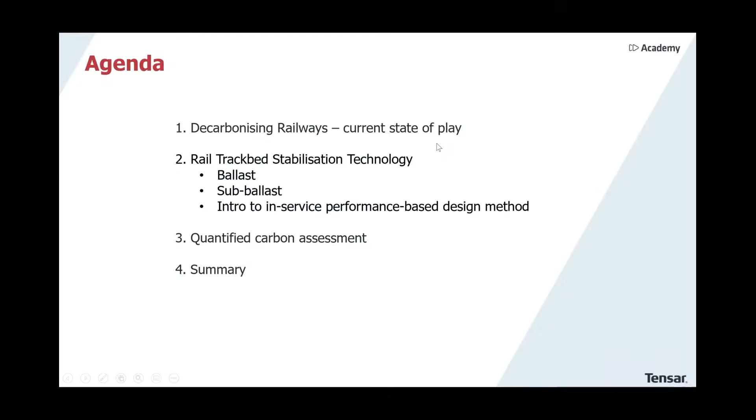The agenda for today will start with a general overview of the current state of play relating to decarbonising railways, referring to the latest industry publications, and tying that in with the latter part of the presentation, where we'll apply the understanding of Tensar's rail bed trackbed stabilisation technology in terms of a quantified carbon assessment, showing what the reduction in CO2 equivalent would be for adopting geogrid product systems within the trackbed in certain cases and scenarios.

The summary will give a quick recap of what we've covered, and then we'll open the floor to a Q&A session. I want this to be as interactive as possible, so if you've got any thoughts or queries, we can talk that through.

An important one to start with: the Network Rail environmental sustainability strategy, with 4 key points identified. The first is the strive towards a low emission railway, as we talk about electrification, battery powered trains, and so on.

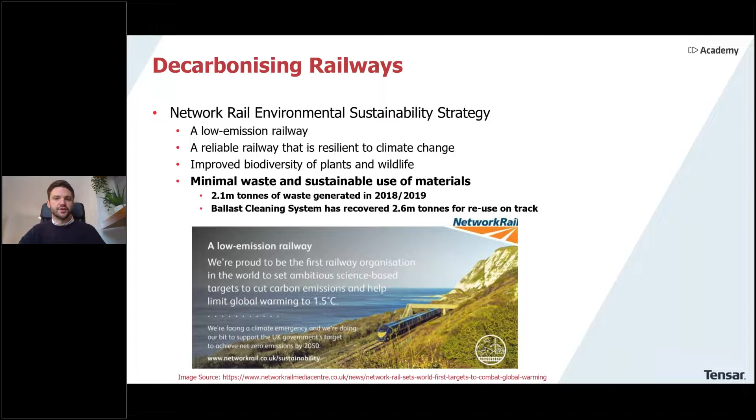Linking this to the earthworks technical strategy, this takes on from the sustainability strategy about the impacts of climate change. We're all aware of the change in weather patterns and the intensity of that over more recent years. How can we make that more resilient? This is the critical infrastructure which we need to maintain.

Prolonged wet weather, increasing pore water pressures for instance in clay slopes, washout in granular slopes, the seasonal shrink and swell - a lot of these key parts which we can start to tackle with different types of trackbed or embankment stabilisation technology.

An interesting one as well, when we start to potentially talk about modal shifts - taking lorry loads off the roads and putting them onto train tracks. Are we likely to see increased embankment traffic loading and tonnage growth as we see the need to add to what we've got with passenger trains? If we're going to have increased freight, then we need to make sure we're designing for that accordingly and can make that resilient.

So we will touch on that again later in terms of how Tensar have developed our design method to take into account these variables.

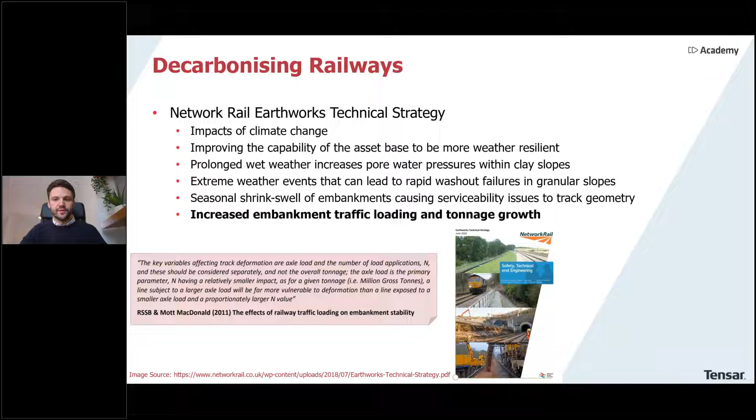The PAS 2080, carbon management in infrastructure, is a critical publication in my eyes. The world's first specification for managing whole life carbon in infrastructure. It's certainly been discussed within the advisory committee I'm on, which Joe mentioned during the intro session. Some very important information and guidance on there about having meaningful reduction targets, baselines, quantification, so we can have some tangible goals to work towards.

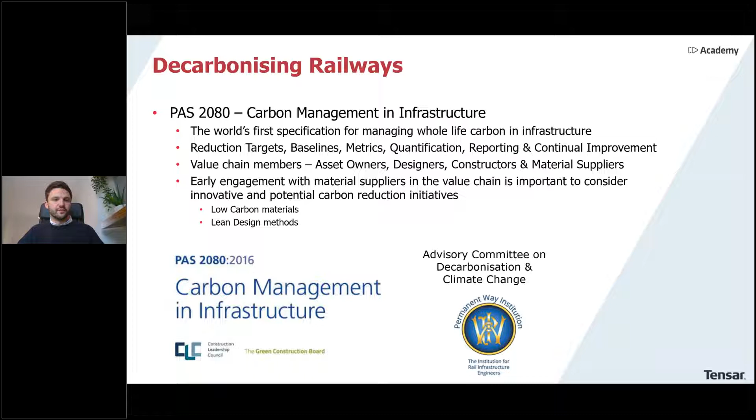An important feature of it is having collaboration through the value chain members, not just through the asset owners such as the likes of Network Rail. How can we engage from the designers down to the contractors, the people actually installing the systems, the material suppliers? How are we embracing innovation and adopting the improvements made in technologies? This can look to source low carbon materials from the onset, or essentially look to make benefits of leaner, evolved design methods.

The RSSB rail carbon tool - there's a variety now of different carbon tools available for general infrastructure projects, but the RSSB one is specific to rail. You can see now, as part of the Network Rail environmental and social minimum requirements, that it's a necessary undertaking for a carbon assessment on a project with a net spend of over £1 million on civils, track or OLE. The projects must demonstrate that the results have subsequently been assessed and influenced the design and construction, reducing embodied carbon and saving, leading towards economical benefits as well.

A standard input source of information for these would be the environmental product declaration sheets, which we'll touch on briefly in terms of the data Tensar have available for input to these types of carbon tools. There's a lot of general information that can be put in, but in terms of product specific data, this is the general requirement which we can share as a material supplier.

Setting the scene, we'll now delve into rail trackbed stabilisation technology to put into context where Tensar can come in and start to create benefits in terms of the trackbed construction.

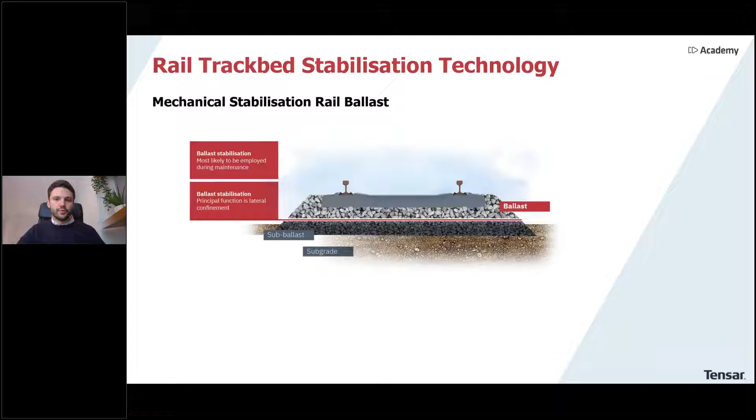In these conditions, we were using a typical 300mm ballast with and without geogrid, and we looked to see how that build-up would react to cyclic loading, simulating rail traffic movements.

This was done over soft and firm subgrades, and the general benefit shown was a magnitude of around 4 in terms of the extended service life period before reaching its critical sleeper settlement limit. So we could see there was a concept there which could be taken forward onto larger scale testing to validate the performance of this type of technology.

This was ramped up with British Rail in 1994, where a 40-ton rolling rig load was tracked along, simulating up to 2 million equivalent gross tons, again with various build-ups with and without a ballast stabilisation geogrid utilised.

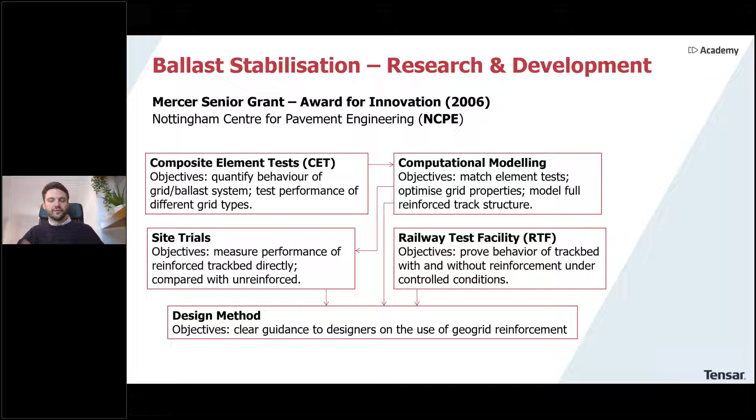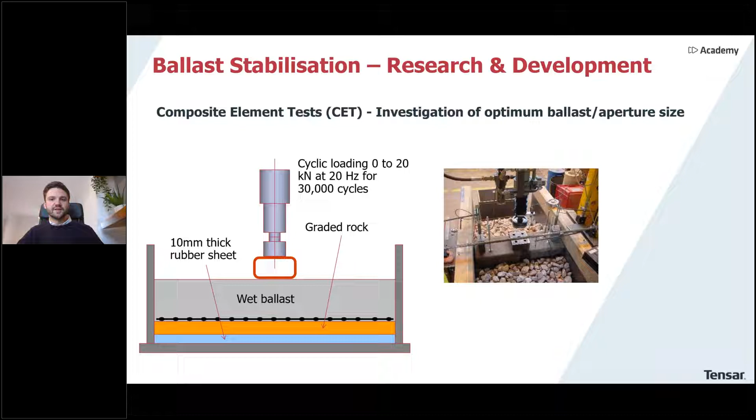If we look at the typical grading of a ballast aggregate, what we were able to do then is look at different aperture sizes of the geogrid to see, under small scale cyclic load tests, how these geogrids fared and what the optimum material properties were.

What we found from the aggregate gradings was that the optimum aperture size correlated to around the sieve size where 50% of the grading was passing, multiplied by 1.4.

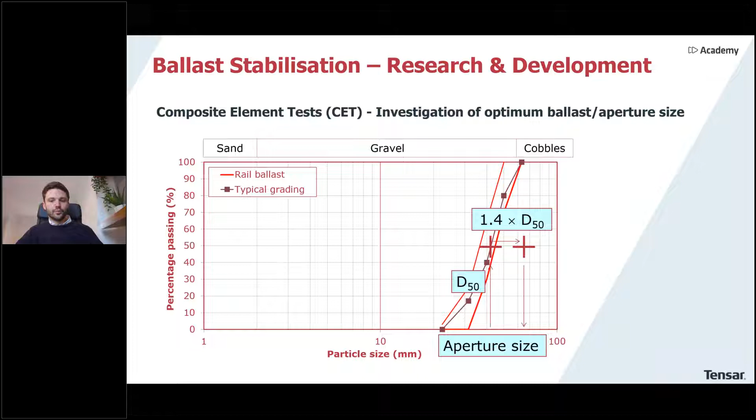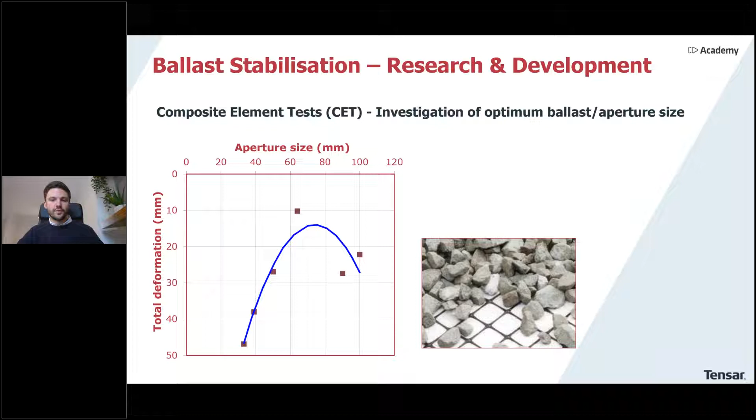As we can see by this neat curve, geogrids with apertures that were too small didn't allow effective interlock, whereas where the apertures got too large to effectively provide that interlocking confinement, the performance dropped off again. So we found this optimum aperture size, which is where the large aperture originates from for use in ballast stabilisation.

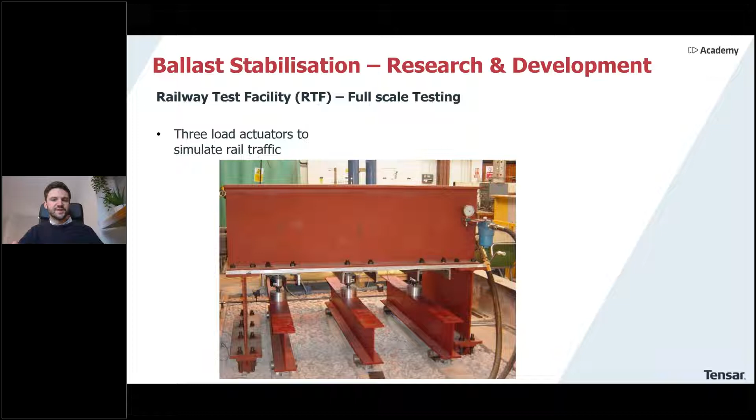Once we had this, we were then able to take a single geogrid through to larger scale testing. The railway test facility had a setup of 3 sleepers with 3 load actuators to simulate rail traffic to a significant number of loadings, up to 1 million cycles.

Again, from our very early laboratory tests back in Canada, to the work we did with British Rail, and now onto this larger scale testing, we can see similar types of benefits. The service period using the geogrid was extended by around 2.5 times before reaching the critical settlement limit for the sleeper, which I believe was around 6 millimetres.

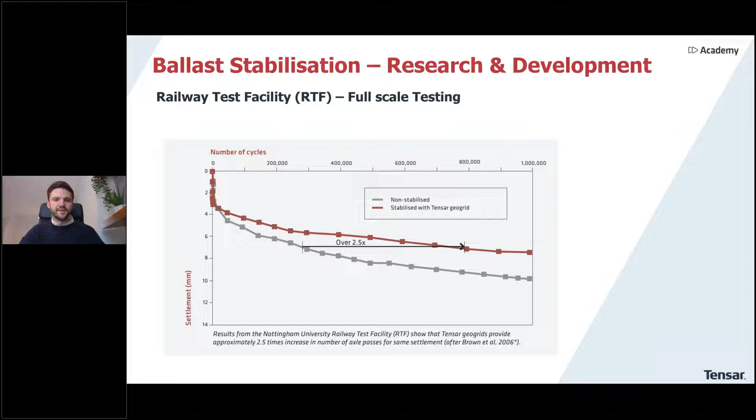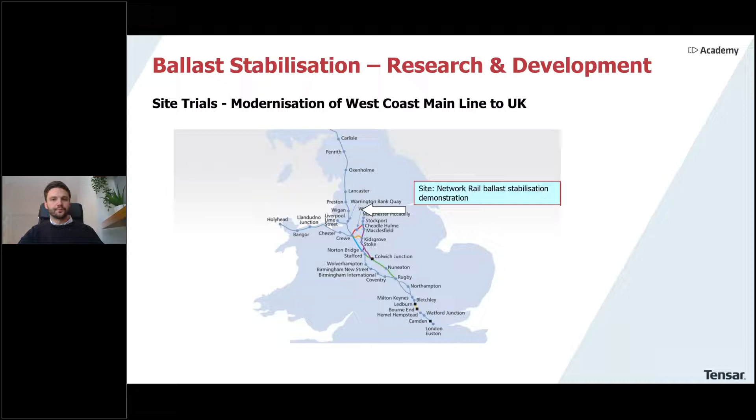Once we'd proven the benefit of the geogrid within that increased testing, we identified together with Network Rail a suitable section on the West Coast Main Line where we could apply it at a larger level with control sections which could be monitored along with the stabilised sections. So this was up in the northwest around the Wigan area.

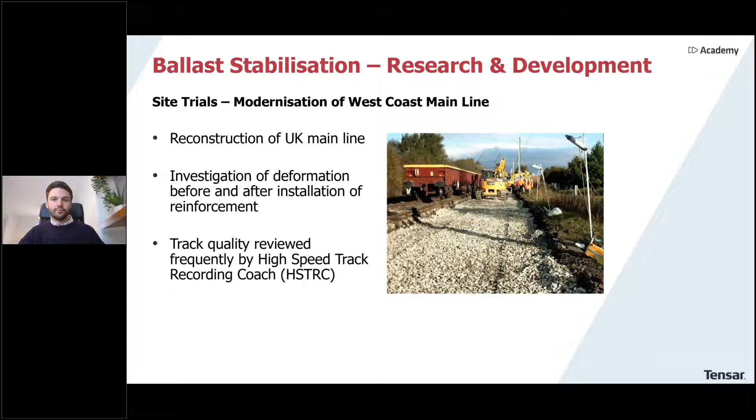If anyone's familiar with Coppull Moor, there had been issues with this particular section, and it was getting towards a point where the frequency of maintenance was leading to a requirement for full reconstruction of the main line. They had the ability to use the high-speed track recording coach, so again we could have significant data fed back over regular periods, so we could really build up a good level of data on how the products were performing in service.

You can see the section of line there, where we were looking at maintenance schedule being applied a couple of times a year in certain phases. Once the installation of the geogrid had occurred, we got beyond 3-4 years before it was reaching anywhere near the need for it to be maintained and have any work done to it.

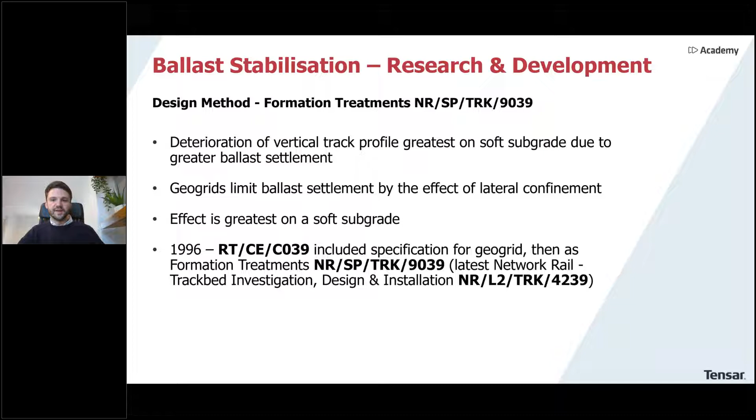And we were able to take this forward into a formalised design method, which is still active today, from the design curves you can see from the 4239 standard. We can see how this was incorporated here, taking those principles of a geogrid over a softer subgrade, providing a similar level of performance to that over a stronger subgrade.

You can see from the 4239 standard here, for existing lines between 50 and 125 miles an hour, you've got the option with and without a geogrid reinforcement. So we're allowing for a lower sleeper support stiffness, which correlates with a lower formation stiffness, but as we've shown through the past research and development, we will provide a similar level of performance.

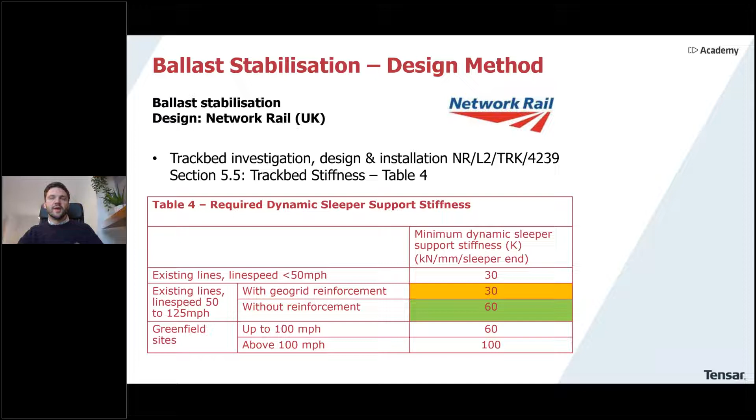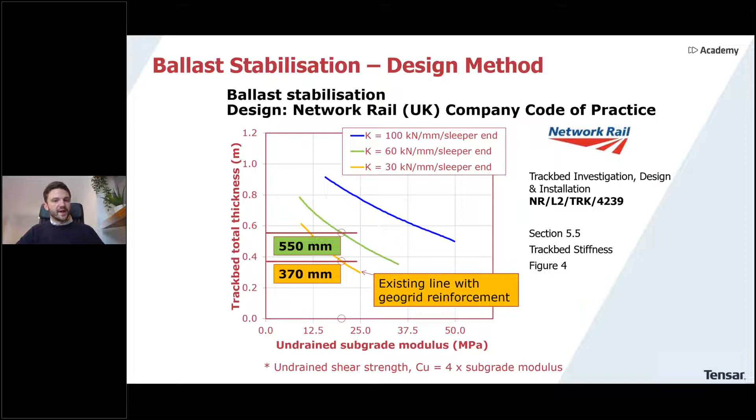If we read off the curves there to give an understanding of the impact, we can see if we're designing it for that 60 kilonewton sleeper end stiffness, we've got a build up of around 550 mil for the case shown there, with a 20 MPa subgrade modulus, compared to 370 mil for the same with the geogrid build up. So we're saving in the region of around 180 mil of thickness there of the sub-ballast.

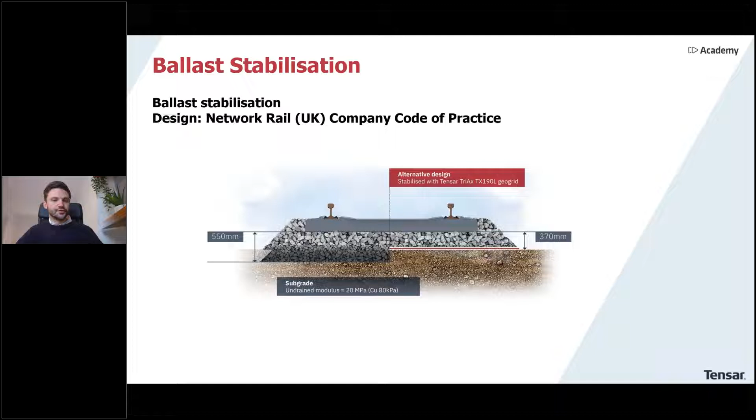So that's limiting potentially the import of the capping sub-base material, as well as potentially limiting the need for disposal of unsuitable subsoils during the excavation.

Back to the timeline. So taking that forward from 2007, where the invention of the Tensar triaxial technology came in, we further developed this technology using a different geometry of geogrid to provide enhanced interlock confinement and a stabilising effect. Work was done to quantify this improvement with the Czech Technical University, where we've got a number of past research works which again demonstrated a betterment over our historic biaxial geogrid technology.

More recent work with Penn State University in America is looking at smart rock technology - 3D printed ballast particles with accelerometers in, so we can actually monitor how this stabilisation effect of the geogrid can limit the rotational movement of the ballast and the subsequent breakdown degradation of the ballast itself.

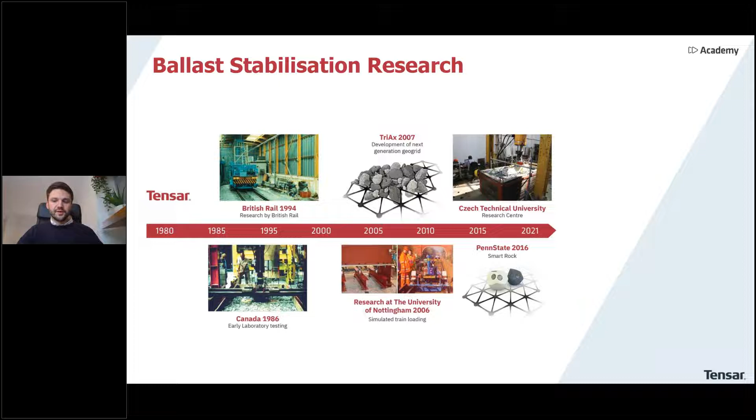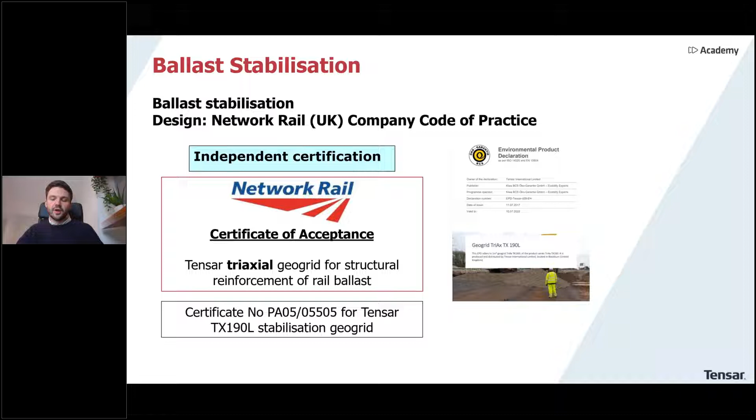For the ballast stabilisation product, we've got the Network Rail approval for the Tensar Triax TX190L product, and importantly, relating to this presentation subject, we've got the environmental product declaration, which can be fed directly into the carbon calculator tools. This is an independent product declaration sheet which covers the embodied carbon of the product itself. It's obviously a manufactured plastic product which has a quantified carbon impact, but it's the associated benefit of that, and in the longer term, which will show the benefits.

On to sub-ballast stabilisation now, moving down through the trackbed layers. As I mentioned previously, our general approach for this is to design the sub-ballast to achieve a target at the formation, so the base of the ballast layer. Typically that would be the dynamic modulus or the EV2 static modulus, and we've got experience of that not just within rail, but within other general applications.

That's one approach. Or again, if we're aware of the high axle loads of the train vehicles, then we can start to model that potentially through finite element analysis to see what the loading deformations may be. We have the mechanically stabilized aggregate layer with increased strength support, which can provide a benefit there.

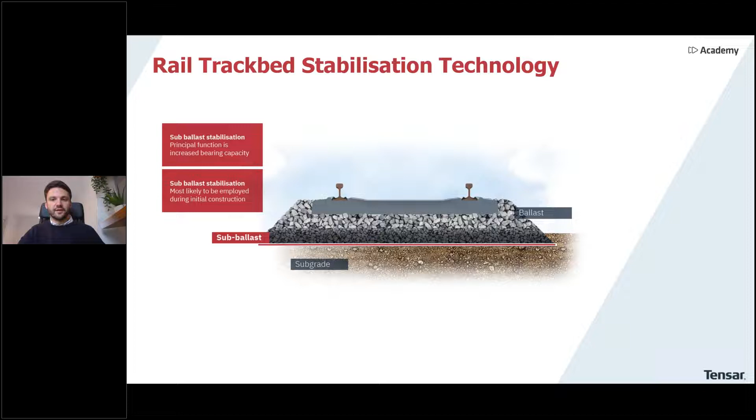It's an established design approach which we've got, but there are a number of variables there. The achieved target level of support stiffness can vary depending on the quality of that granular fill, the weather, and the compaction regime. So there are a number of variables we need to be careful to cover with any sort of guidance we provide.

A lot of this work was initially done across Europe, where this EV2 stiffness modulus has found its way across onto the network rail design standards. We've got significant experience of providing these type of solutions across Europe through our global design offices.

With the advent of triax, we work not just at using geogrids within the ballast, we introduced that within the sub-ballast layers as well, trying specifically for new construction. If we can keep the grid as low down as possible, then we can limit any conflict with future maintenance, tamping, etc.

We also did work with Heriot Watt University looking at high-speed rail ballasted track, not related to HS2, but general high-speed rail projects, which again showed benefits of having this stabilised aggregate in terms of the high cyclic loads from the speeds of the train.

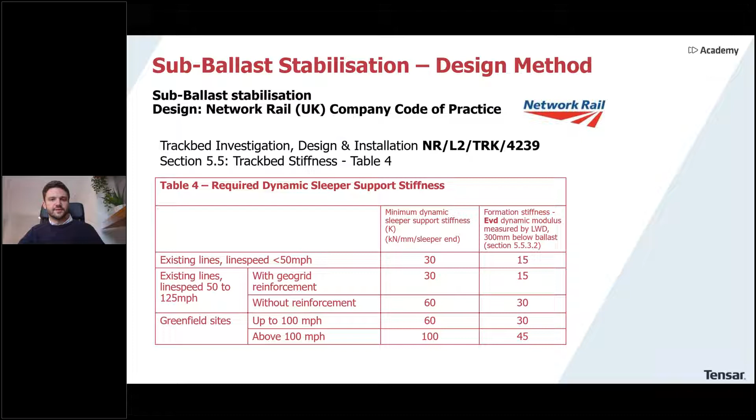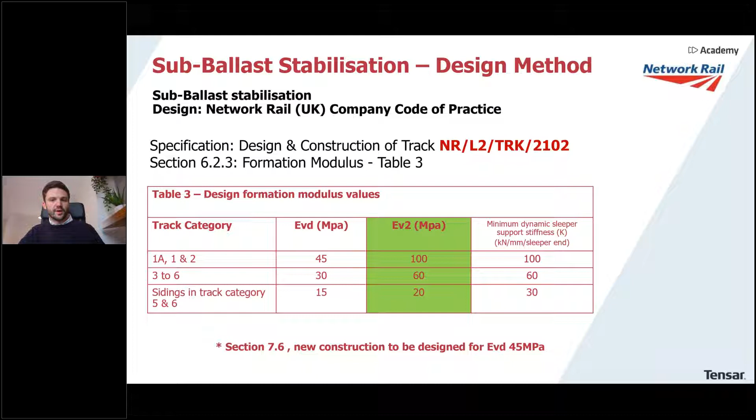I mentioned in terms of providing this target level of the stiffness modulus. If we relate that from the 4239 standard onto the 2102, you can see the relationship there, and what we're comfortable with designing at Tensar from our works through other global design offices is designing for this EV2 static load modulus. So if that's a requirement, we can simply work towards that with the relevant guidance.

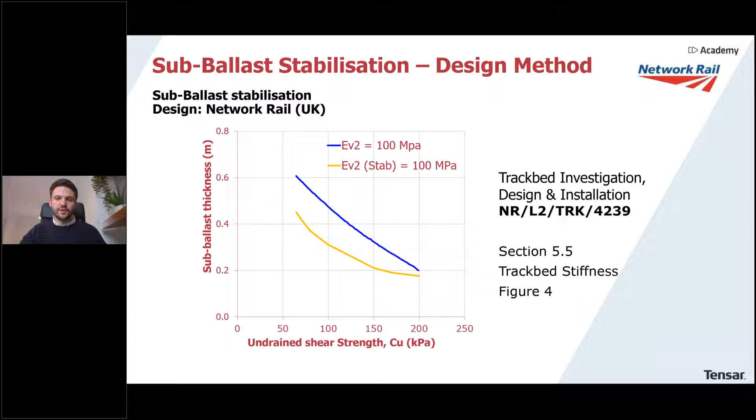We can work from established design curves and show, with and without the use of a Tensar triax geogrid, what the build-up thickness would be. A typical reduction over soft to firm ground is in the region of around 200 mil stone thickness, which will be used in one of the later examples in terms of the quantified carbon assessment.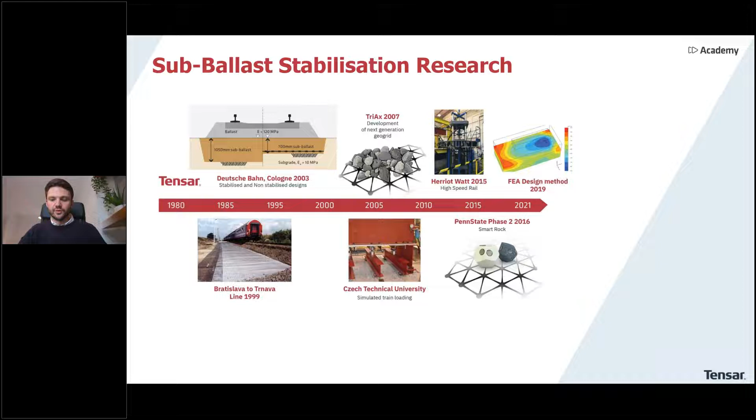It's basically 3D printed aggregate particles, both ballast size and sub-ballast size, with accelerometers built within them, similar to what's on your mobile phone device. So it can very accurately detect movements, rotational movements, and so on, to see how these are being affected through that stabilizing effect of the geogrid under cyclic loads, simulating rail traffic movements.

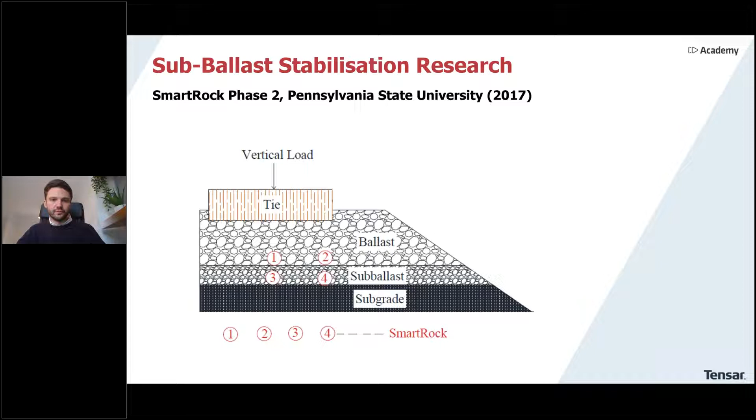You can see within the build-up section where the smart rocks were included, both within the ballast and within the sub-ballast. We've done various trials with this.

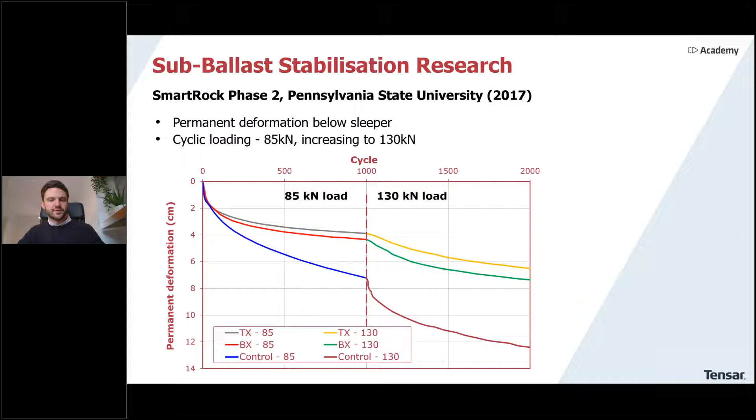You can just about see from that, as we increased the load of the cyclic loading, you could see the increased deformations with and without the use of the geogrid. This also showed the improved performance when using the triaxial geogrid with its hexagonal geometry against that of the historic biaxial geogrid product, showing improved performance and increasing the service life.

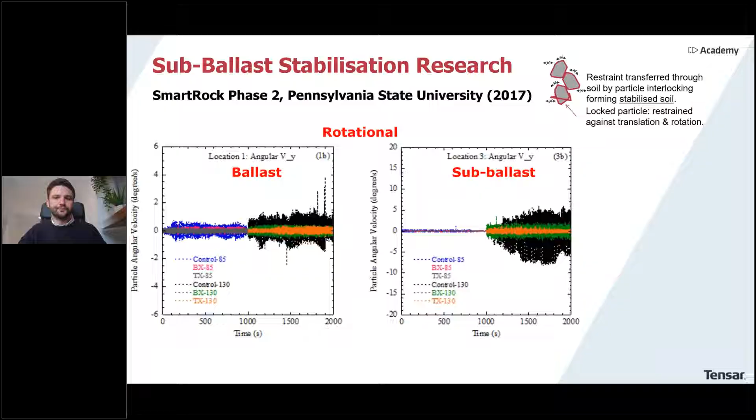A very brief intro into the new design method which we're slowly introducing.

I mentioned from the extract from the earthwork strategy about taking into account the potential increased loadings on embankments and the subsequent stability of those, but also how that affects the trackbed construction.

If we're used to dealing with say 100 kilonewton axle loads and we're increasing that to 250 or even beyond, then that will have an impact on that trackbed. So we may need to ensure that we stiffen that up or make sure we've got sufficient strength to limit the deformation, the settlements of this sleeper.

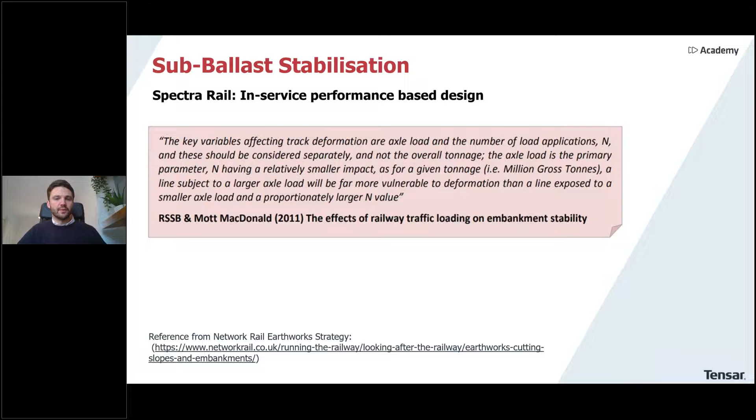So we've developed design methods to not just look at the overall gross million tons of traffic, but we can actually break down through different loading axles and number of repetitions how that will affect the serviceability of the trackbed construction. That will relate to a performance-based design where we're limiting the plastic subgrade deformation as well as the progressive shear failure, so we can work within serviceable limits, and this can subsequently be modelled in an FEA programme using the Tensar soil stabilised model.

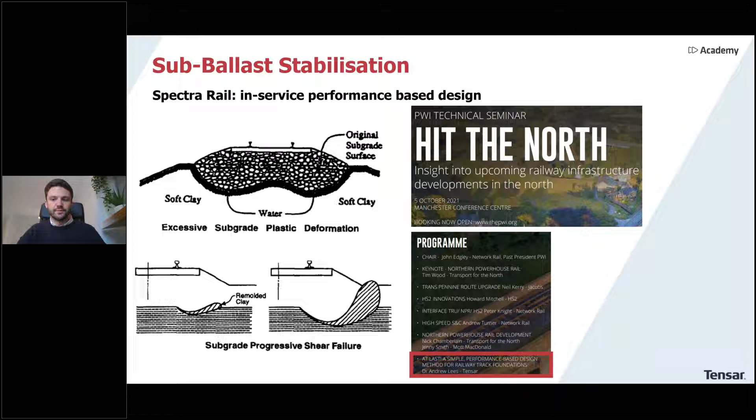This was covered in much greater detail - I think this was about a 40-minute session in itself, covered by Andrew Lees, our head of technology. If this is of interest, then we can arrange a follow-up session, or contact me and I can share relevant papers on the subject.

This does open itself up to much more sophisticated design analysis compared to what we've historically done, and when we start to look at transition details and so on, we can potentially account for variable subgrade soils. We've got the ability to now model this more accurately and effectively.

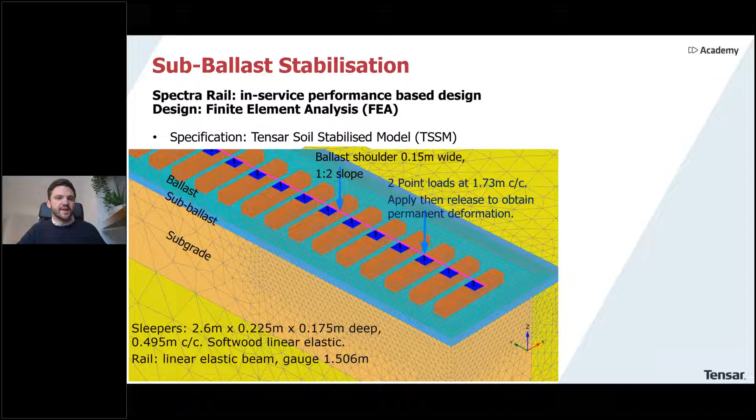The value proposition which this allows us to look at is that we may have a conventional build-up which is looking for a value engineered design. Are we looking to provide the same amount of serviceability while providing the lowest installed construction costs, so reducing the thickness of the sub-ballast layers to achieve the same performance requirements?

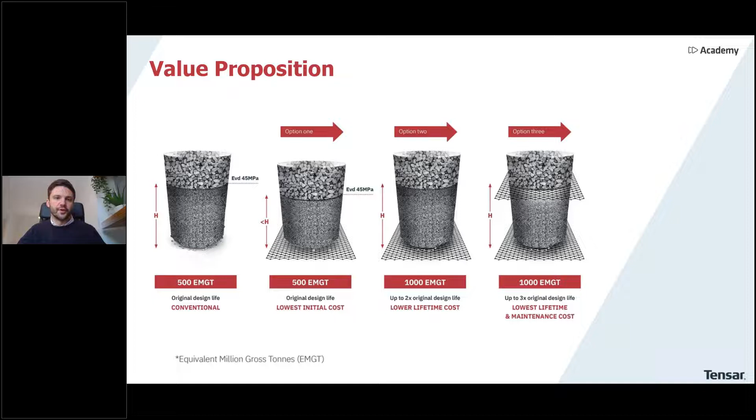Or are we looking to actually extend the service life of this asset, so we're not reducing any stone construction, but instead extending the service life of that asset by 2 or 3 times? So we've got options which we can talk through with the client, the contractor, to make sure we're hitting the right notes.

Now, applying what we've learned about the trackbed stabilisation technology - Joe mentioned early on that Tensar have developed our carbon calculator over a number of years with input from industry, taking in figures from main contractors and clients, working out what we can actually offer the industry that is meaningful, not just a square metre price for a geogrid. We can actually show what the time reduction may be for installation of these systems compared to traditional methods, or we can start to show what the quantified carbon reduction will be.

That might be more difficult for certain areas, such as smoothing transitions, where we're not generally looking to reduce the stone build-up as such, but in certain areas where we can either limit the frequency of intervals before maintenance, or we're simply reducing the thickness of the sub-ballast layer, for instance, then we can start to provide a quantified assessment.

For this example case here, we've got the project site in Leeds, which is around 100 kilometres away from our manufacturing site in Blackburn, Lancashire. The granular fill going into the site is estimated to be around 30 kilometres away. We're assessing a kilometre of track, which is approximately 4 metres in width.

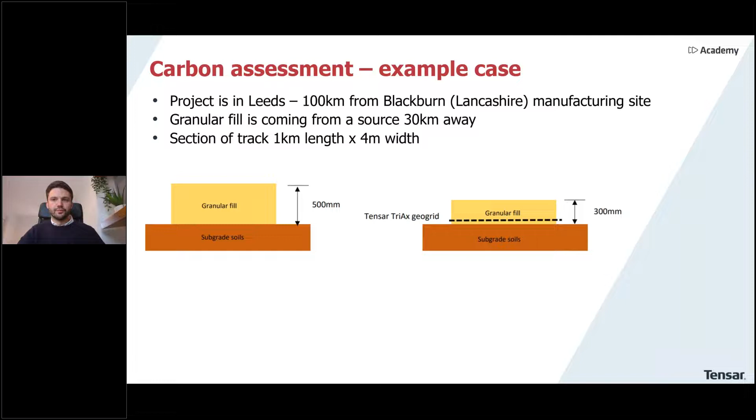The traditional build-up is 500 mil sub-ballast. What we've been able to demonstrate using the Tensar Triax geogrid is that we can reduce that thickness by around 200 mil. If we run that assessment through, we can see that by reducing that 200 mil of stone thickness, we've reduced the volume of granular fill by around 800 cubic metres, which corresponds to about 2,600 tonnes there.

If we look at the carbon footprint of the quarrying operations and compaction operations for the installation of the sub-ballast material, we can see significant reductions starting to come through. We obviously have the additional element of the geogrid component itself, which will be taken from the environmental product declaration.

We take into account the transportation of the granular fill, both full as it's arriving on site and empty on the way back, as well as the transport of the geogrid itself. When we evaluate all that using industry data, we can see for this specific example that we're saving around 39% in terms of embodied carbon. Important to note, this is considering construction from grade. If we took into account the potential saving of 200mm excavation of unsuitable subsoil and carting it away to landfill, or to a neighbouring site some distance away, that 39% value may well extend beyond 50%. So in the right scenario, there are significant carbon savings that can be achieved.

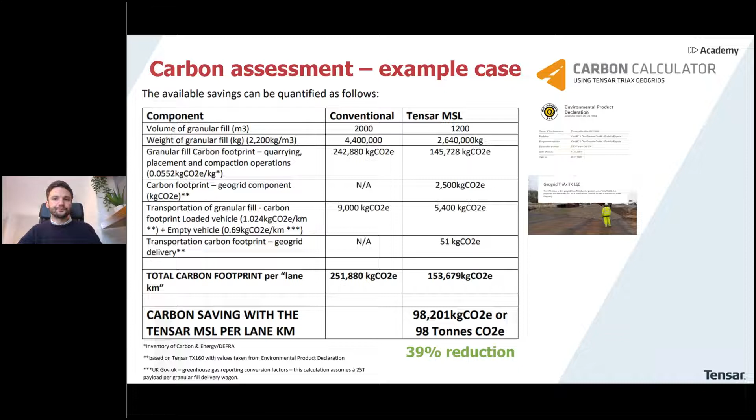The Tensar Triax geogrid full product range has an Environmental Product Declaration. We're currently in the process of upgrading from cradle-to-gate to cradle-to-grave, which I believe should be in place by around May or June this year, pushing the boundaries in terms of the requirements to demonstrate the full life cycle of the product. This is the standard input source of information to a variety of carbon calculator tools.

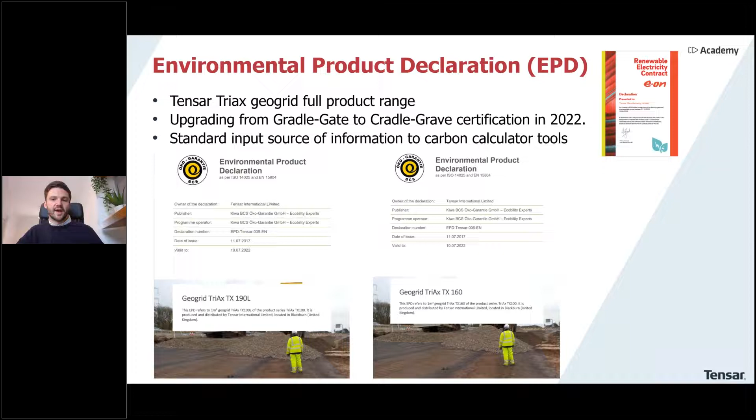You can either contact me or go through Tensar's website - this isn't secret information, it's freely available. What the upgraded EPDs will also include is the benefit of our manufacturing facility in the UK sourcing 100% renewable electricity, and there's some ongoing improvement works there to limit the embodied carbon in terms of our product.

Pulling this back to one of the early slides, the rail carbon tool stated that there's a statutory requirement that projects with a value of over £1 million spend should be carrying out these carbon assessments, with the findings influencing subsequent design and construction. So we certainly have the capacity to input and start to show savings on these projects.

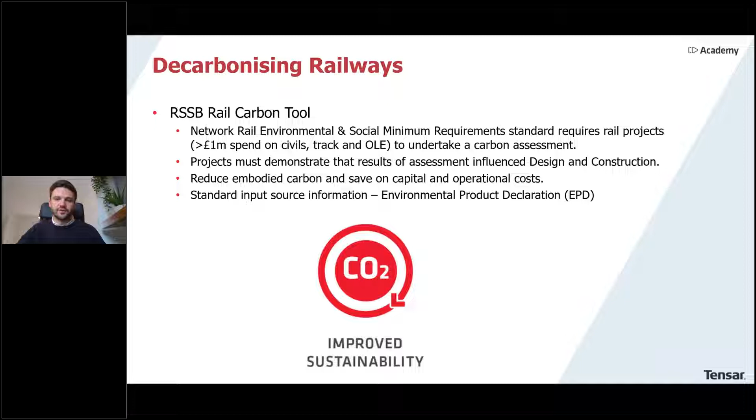Finishing off now, hopefully it's come across that the Tensar trackbed stabilisation technology has been extensively researched and developed with a number of proven applications. Where we can come in for decarbonising the trackbed build-up is limiting that trackbed layer thickness and subsequent excavation and disposal of subsoil materials, extending the service life and reducing maintenance intervals.

We would love to share more data on that, but we need to work closely with clients and designers to get more meaningful data so we can start to quantify what the carbon reduction benefits would be there as well. But all of this comes from the standard source of information for the grid component, the environmental product declaration.

Tensar, in terms of our UK operations, are RISQS-verified, not just for the supply of the product systems but also our design services, which are audited annually. So if Tensar are required to take design responsibility and develop this carbon reduction proposal, then we have the capacity to do that.